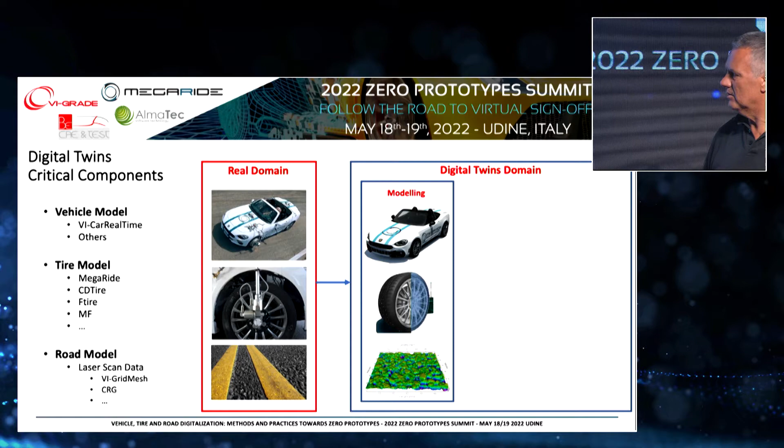Yeah, zero prototypes. Digital twins, sure. We want to go to that level. We can do digital twins of several different components: the vehicle, the tires, the road, and the simulator. All these together could basically replace the real experience. And we started this joint work more than 1 year ago, putting together all the elements that make us confident that the digital twin, not so much of a specific vehicle but as a process, could hold, to continue the discussion and rely more and more on this duplication.

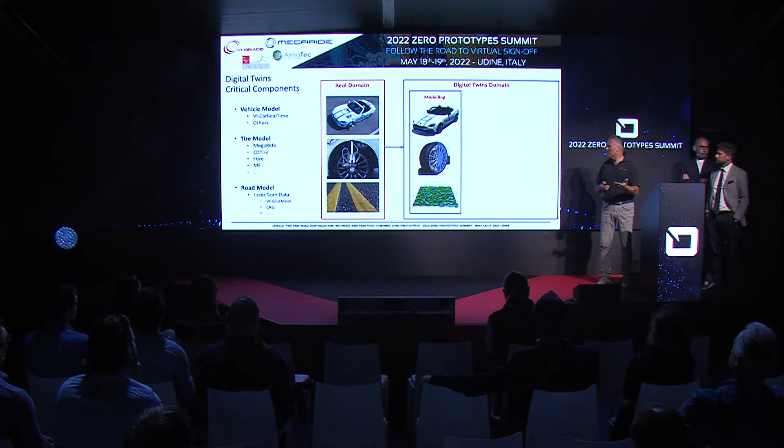So we are okay with the vehicle model, with the tire model. The road model has always been something that for us was basically just inherited from geometrical measurement. But in reality, what we need to be sure of is that the road model, the tire model and the vehicle model are compatible with each other. So which type of work has to be done, for example, in combination with the road, the tire model and the vehicle model to have a reliable result.

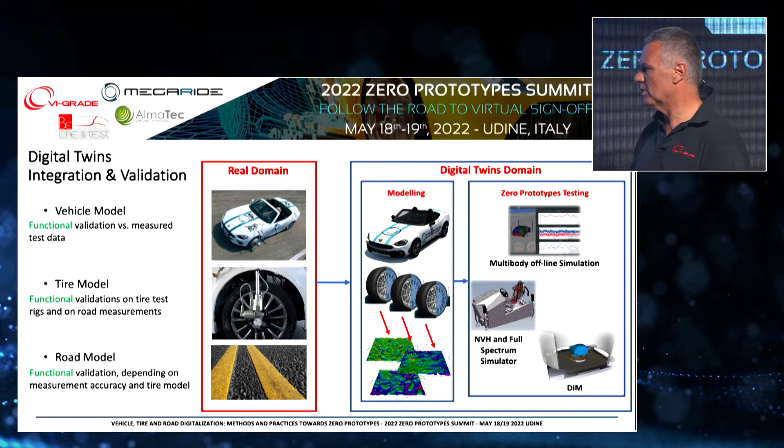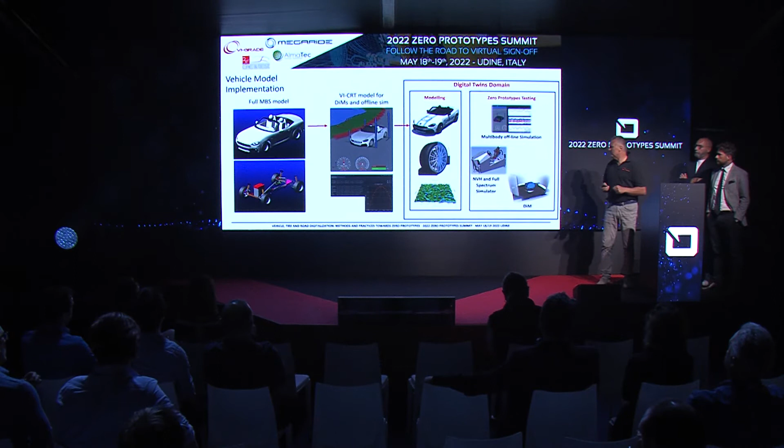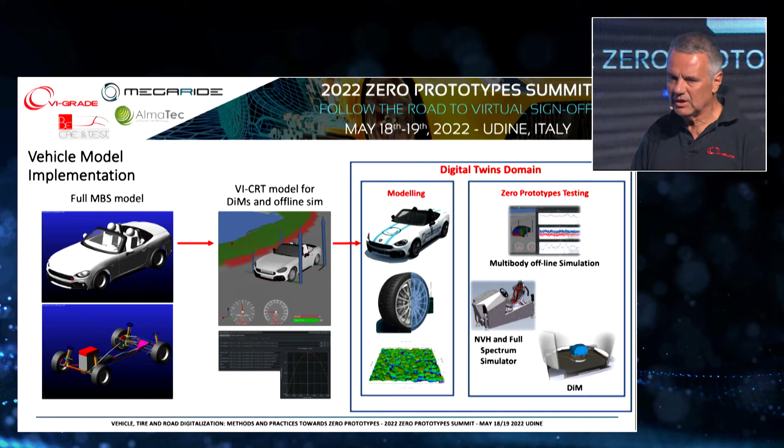You will see later. We want to have the full experience on the driving simulator. So we develop a really detailed model of the vehicle. Maybe we go to a simplified model or use the detailed model depending on the application. We use functional modeling, not only the independent component-specific modeling; the integration of the modeling is certainly a very important part to consider. And you will learn later what detailed activities need to be done to have this respond to requirements.

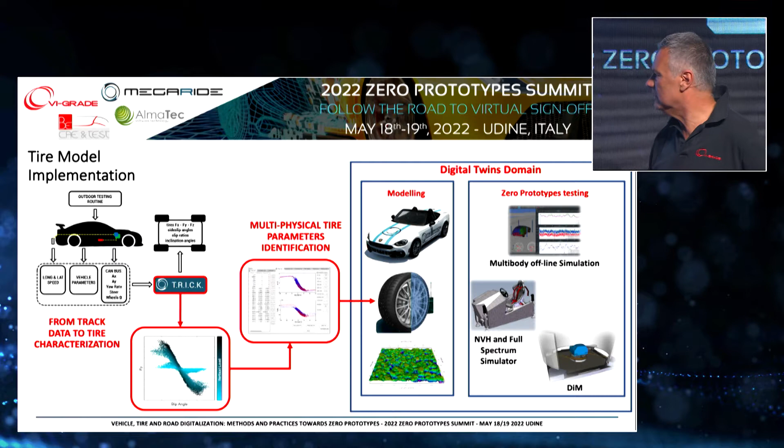Obviously, for the functional road model, there is some activity that has to be done, also measuring and knowing what is required to be captured to provide in the simulator the important feedback for the driver. Then we can probably digitize everything, but the only thing we cannot completely digitize is the human driver. So after we do a really good job, how do we make sure that all this can be perceived in the right way by the real driver? We still have a real human on board the simulator.

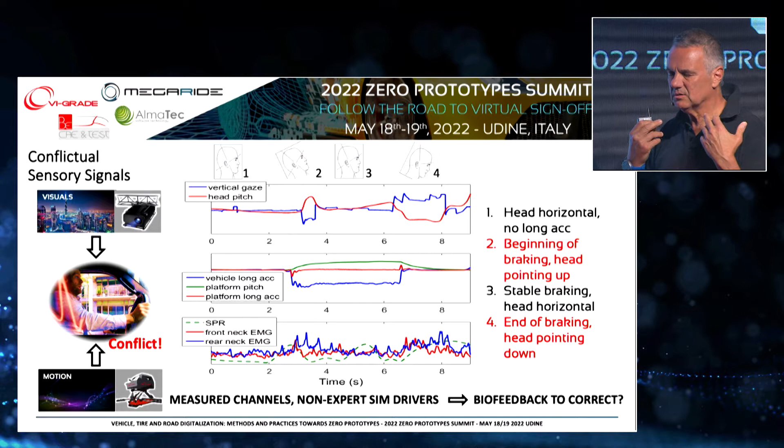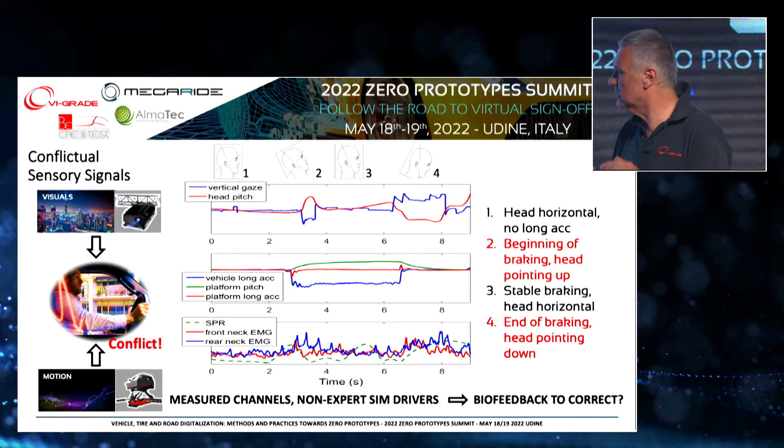And in this simple case, we illustrate how, for example, there is a sensory conflict in a simulator when during a braking action, the human expects to receive a certain acceleration, so he pulls the muscles of the neck back, resulting in the head, without any consciousness, being tilted upward, while the gaze goes down to keep the horizon fixed.

And this is probably creating too much of a rotation, unstable rotation of the head. One has to realize what could be, especially in a beginner driver in the simulator, his limit. And one idea that we want to apply and see if it could work is to apply biofeedback on the simulator, like skiers are taught by a coach when they see themselves again, for example, during an action. So it is possible to correct a little bit beyond what normally could be thought.

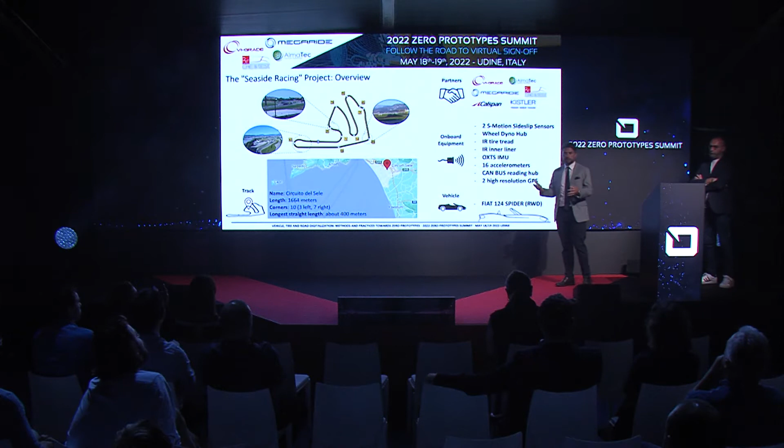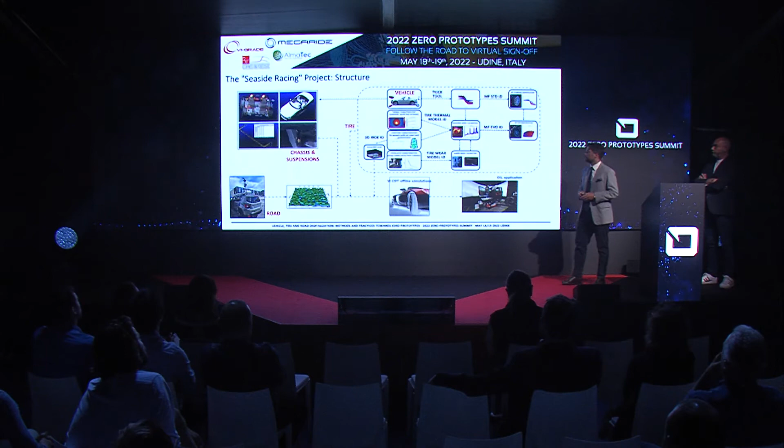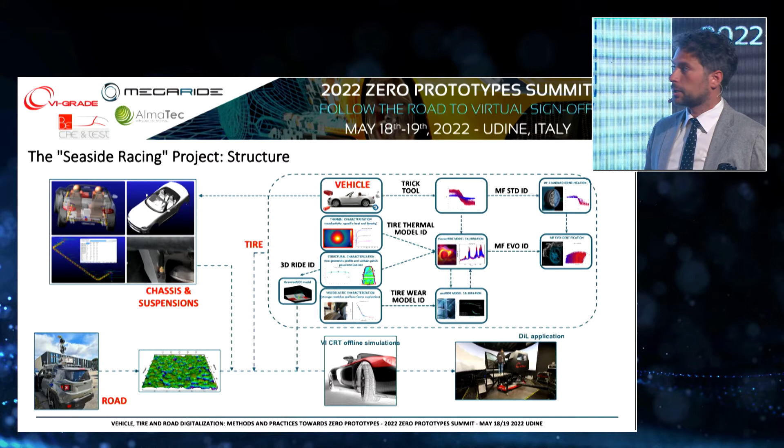So a potentially unknown track, potentially unknown vehicle, potentially unknown tires, trying to digitalize all of them with the process. The main idea is starting from the multi-physics of the tire, with a certain tire of which we don't know anything at the beginning. Then the activity we usually do on vehicles regarding the parameterization inside, for example, CarRealTime. Then there's the road, with the devices which allowed us to know something more about that road, virtualizing it and bringing it first inside the offline simulation channel, and after that into the driver-in-the-loop application.

So the targets of the project were optimizing the road texture geometrical resolution related to tire modeling and contact multiphysics. Then we wanted to deepen knowledge on tire ride and wear effects on the driving perception. We want to correlate road geometrical, frictional, and acoustic features of the road patches, and implement all of that inside the driving simulator for a multisensorial experience.

So the first step of our activity concerned the road and the external environment. With the proper instrumented vehicle, we had laser scan integrated photogrammetry, 3 cameras and 2 lasers with millimeter resolution. We scanned all the road of this track, which is Circuito del Sele. The main idea was to clean and filter the road point cloud in order to generate a grid mesh from zero, and after that, create a correlation between the measured roughness and the algorithm parameters. That was the first step.

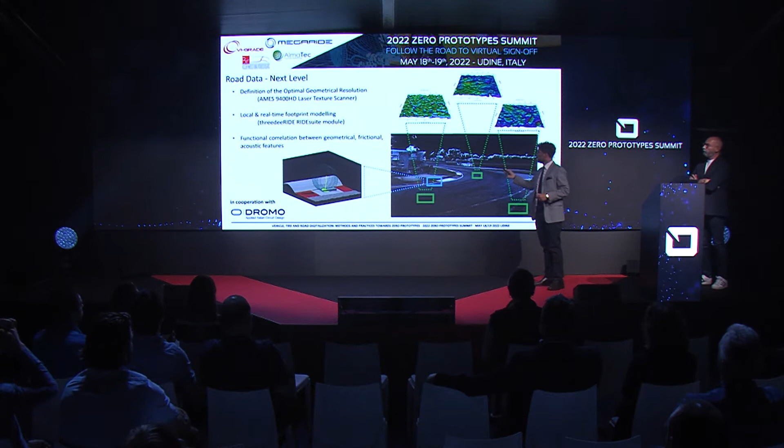The second step is assigning to each single point of the grid mesh some specific functional correlation. It means geometrical, frictional, and acoustic features to each different patch of the road, which has been scanned also with a very high definition rugosimeter, the AMES 9400HD.

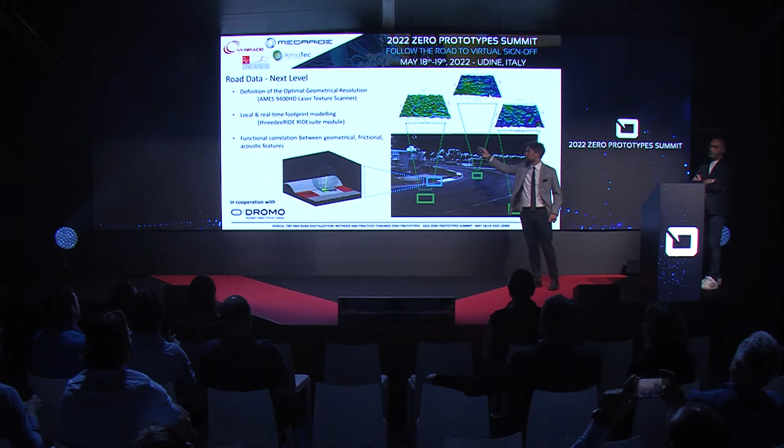Next step, we moved to tires. We selected the tire, it was a Toyo tire, and we used several different methodologies to get the tire data. The first one was with our TRICK tool, which takes the data from the vehicle and allows us to characterize the tires. We also worked with Calspan and their bench, and we also mounted a wheel hub by Kistler on the wheel. So we had 3 different ways to understand how the tires behaved.

After the kinematics and dynamics, we worked on temperature and energy, so we characterized the thermal conductivity, the specific heat, and the footprints with completely non-destructive methodology, and we put them inside our thermal model. And once we have the energies and the temperature, we also have the roughness of the road, and the viscoelasticity of the tires by means of an innovative device called VESevo, which is in our booth in the next room. We had all the ingredients of the recipe that allows us to talk about wear and degradation.

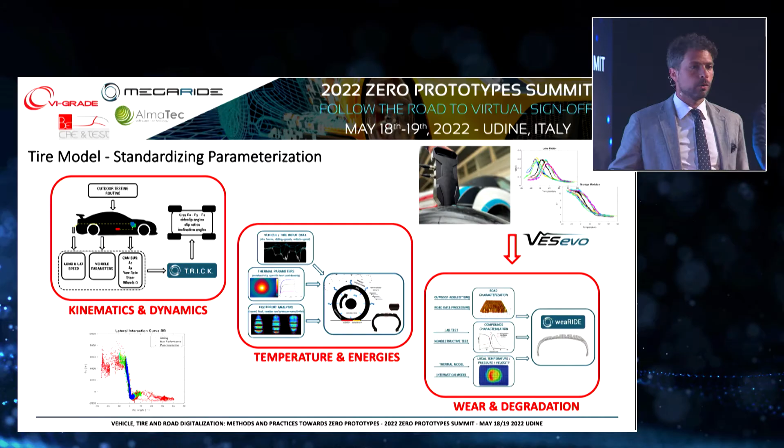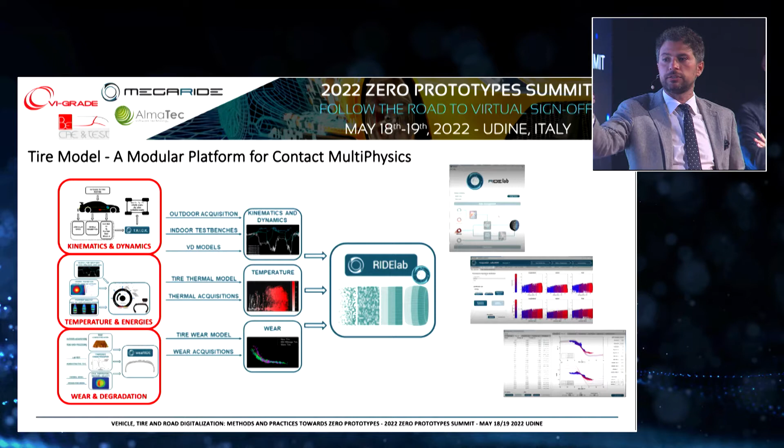Wear is a very complex phenomenon which involves many things which come from so many different phenomena. So after that, we parameterized all our models, feeding a specific identification platform, which is called RIDElab, which takes into account all the multiphysical phenomena, so the kinematics and dynamics, the temperature and the energies, and the wear and degradation, putting the right parameters inside the physical models which constitute the RIDEsuite tire model.

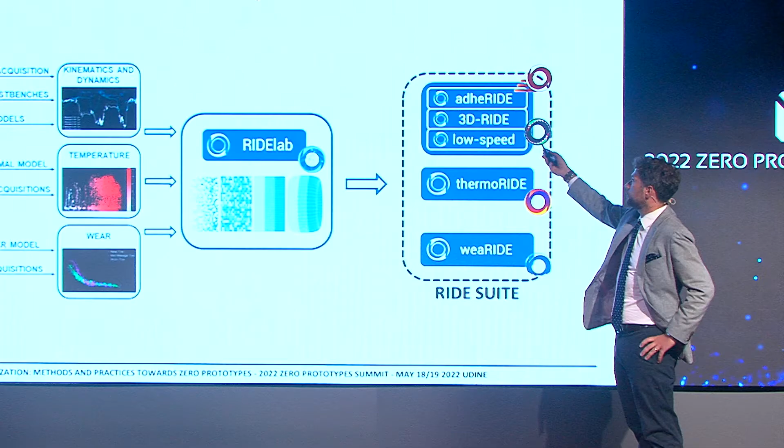We have an advanced Pacejka model which feels temperature, road roughness, and viscoelasticity. We have a 3D multi-contact model that Gabriele will show us later. We have a low speed module because, as you know, sometimes MF has some issues with low speeds. We have a thermal module and the wear and degradation module.

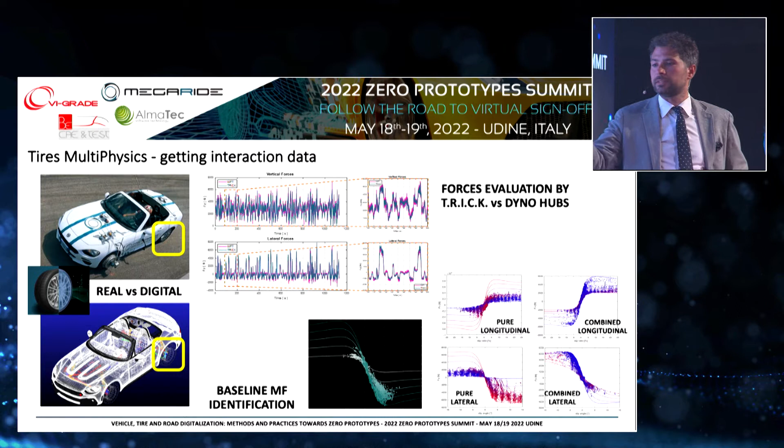What we did in terms of operative activity, we understood how we were estimating the forces with our methodologies. So here we can see that with TRICK methodology, so from the vehicle data to the road, we are able to estimate the forces with very high accordance with the instrumented wheel hub that we had. After that, of course, we identified our baseline Magic Formula.

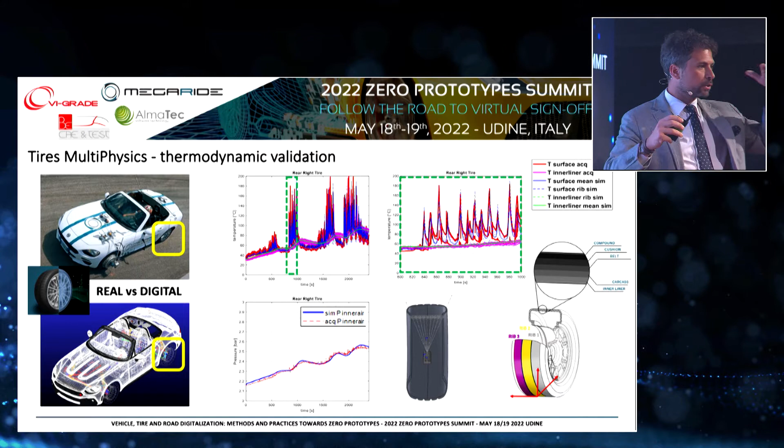Second step was identifying the thermal model. So we calibrated and we validated the thermal model, taking into account the measurement that came from the external tread and the inner liner sensors. And once we have properly identified and calibrated the model, we have all the information about the temperature layers which are inside the tread block.

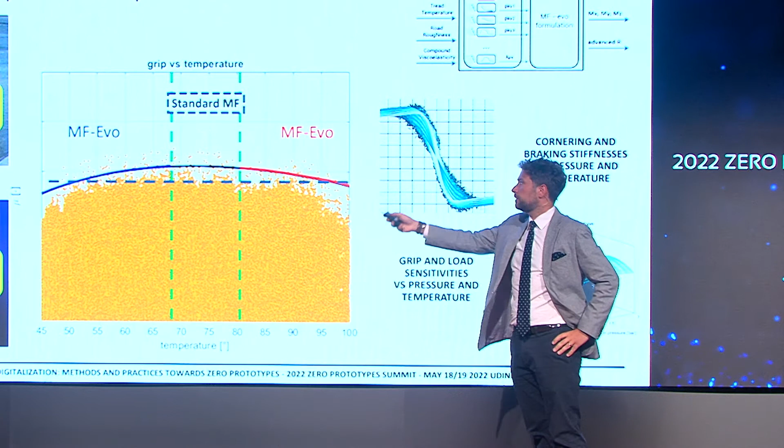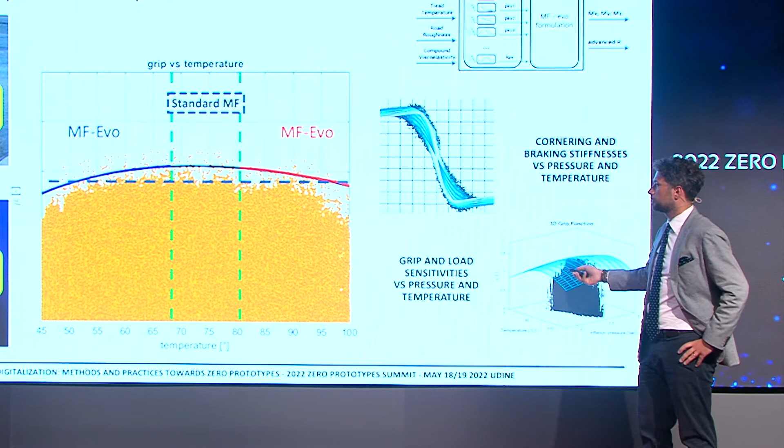Having this kind of information, it's possible to understand how the friction level is changing with respect to the temperature, to identify this kind of trend, putting them inside the advanced Pacejka formulation, taking also into account the variation in terms of cornering stiffness, braking stiffness, and of course, inflation pressure sensitivity. All these things go inside our advanced formulation, which is called MF-Evo, which allows us to put all these things inside the simulations. We also validated these things thanks to some Calspan data.

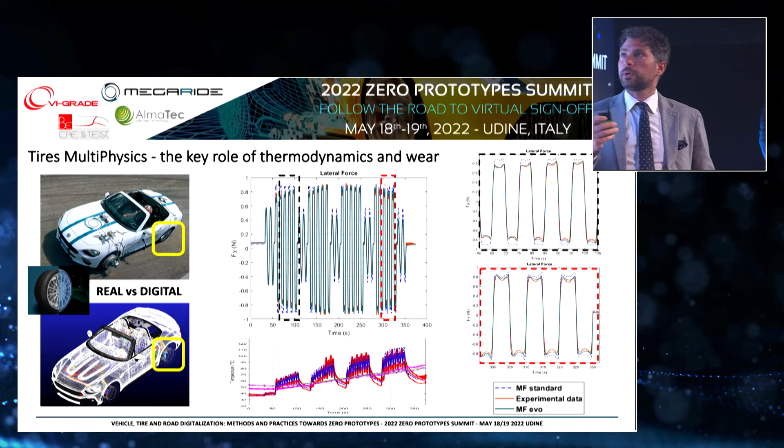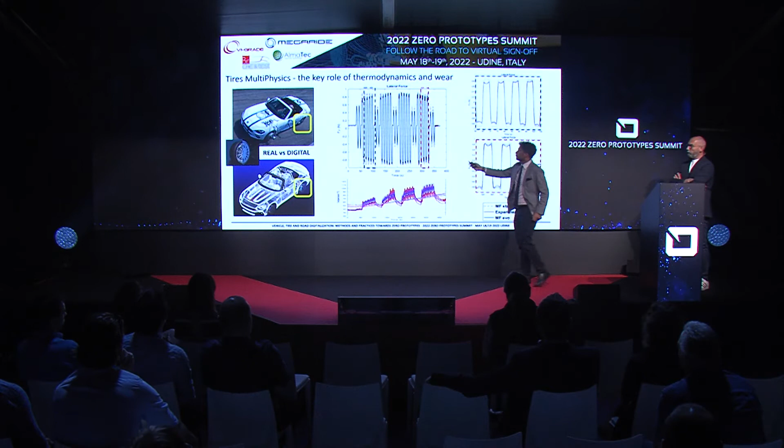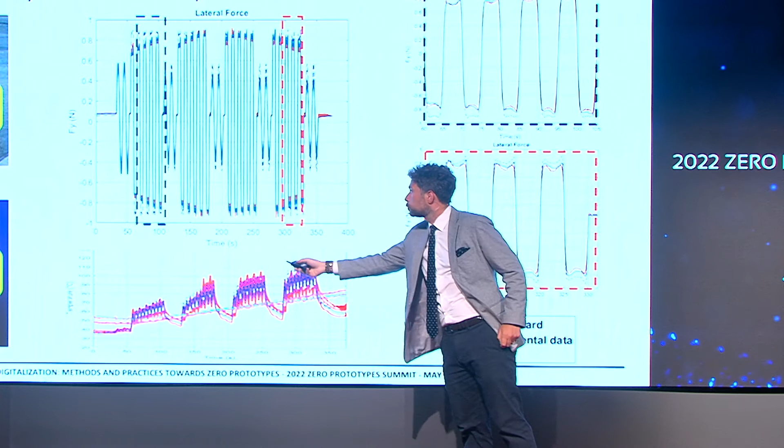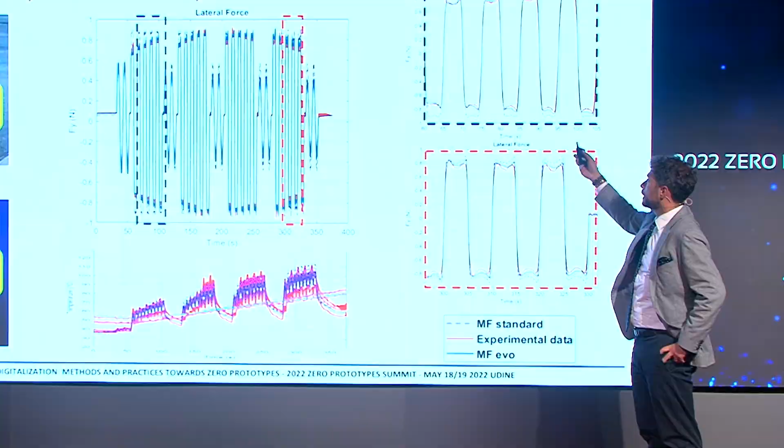And what we can observe inside a typical test is that if we identify a Pacejka at the optimal friction level of the tire, we will be able to fit only the results of the Pacejka when it reaches its maximum. But when the thermal level at which the tire is working is too high or too low, inside the red and black squares, we see that the normal Pacejka is no longer able to fit the friction level and the force level, that can be fitted only taking into account the thermal effects inside the Pacejka model.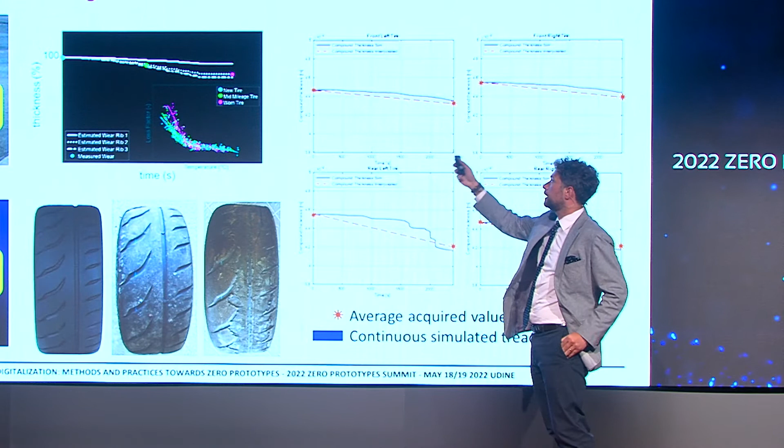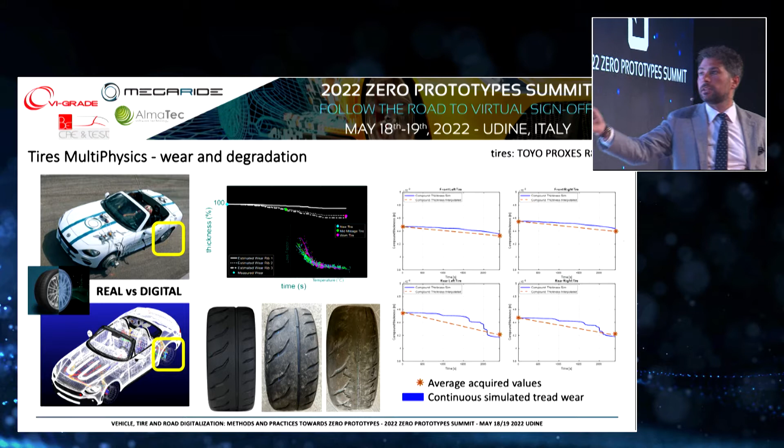Finally, once we had all these things, we put them inside our physical wear model. So we were able also to validate the wear on track because we had the acquisition at the beginning and at the end of each run. And so in this way, we have the acquisition in terms of energies, in terms of temperature, in terms of road roughness, in terms of viscoelasticity variations of the compound of the tire, and we're able to know time by time the evolution of the tread thickness level of each tire taking part in this activity.

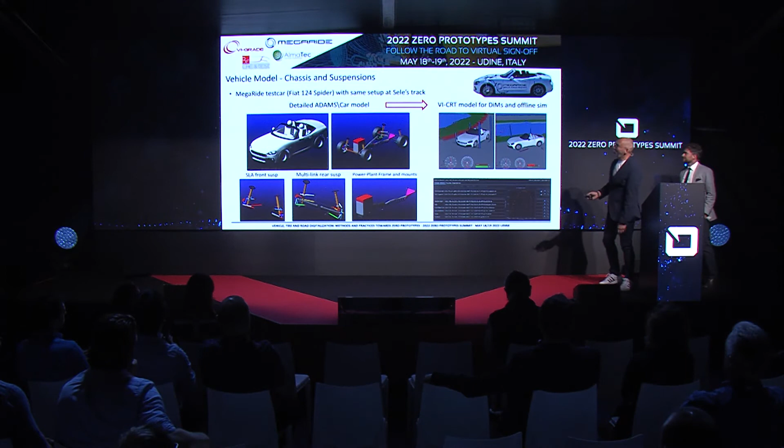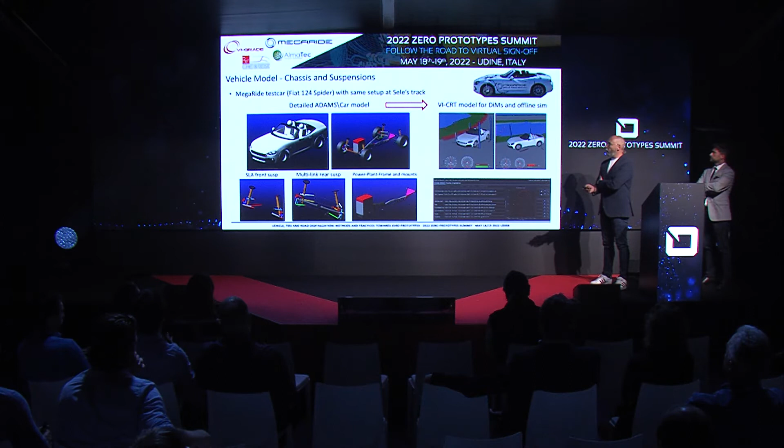Of course, it is the last step, but it is not last in the order of things that have been done: the creation of an appropriate vehicle model. Of course, this is a standard procedure, starting from a detailed multi-body model with many degrees of freedom, and even including the powertrain mount system, into a real-time car model that can work in our driving simulator. Of course, there are initial steps, an offline validation using the offline tools. And of course, we had the possibility not only to make a correlation and validation based on,

I don't know what happened, but okay, once again.

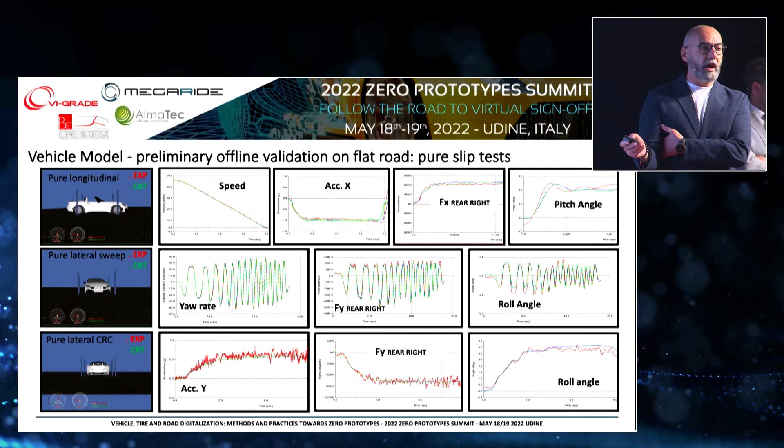Based not only on standard signals like yaw rate and lateral acceleration, but also on forces, lateral, vertical, longitudinal forces obtained from the dyno hubs that were installed. Then we moved offline to a max performance simulation environment, trying to catch the differences coming from different levels of road discretization and road roughness. And of course, having also the possibility to compare the calculated loads and the measured loads along the whole track.

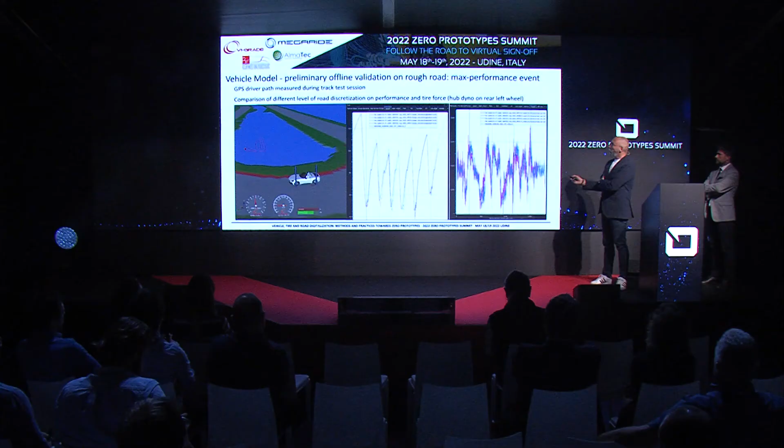After this phase of correlation and validation offline, we needed to understand the feeling of the driver, Claudio Anicello, the driver who is currently running in the demo section at DIM 400, and to receive his impressions comparing the real driving with the driving at the simulator, but not only in a single scenario, but with different simulators, 150, 400, and even the compact, moving from standard operation, which are considered like a sort of chassis tuning

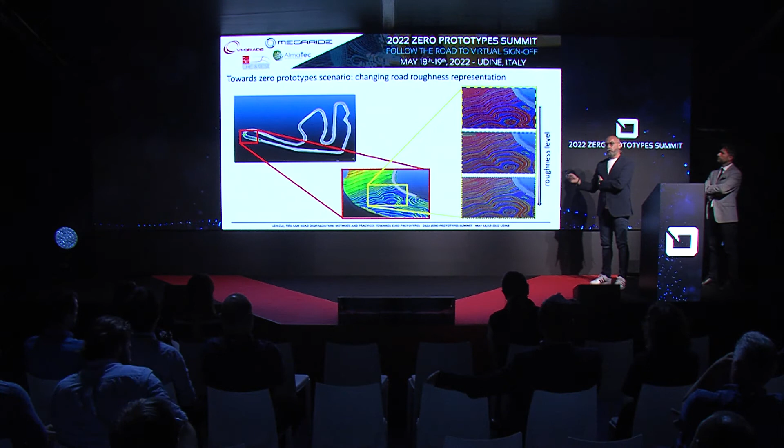towards, we said, zero prototyping, but also to understand the feeling when you change the road surface, when the temperature of the tire changes, so the heating of the tire, and even the wear effects on it based on the model delivered. And not only this part, but also trying to understand what is the best solution in terms of road roughness. Here is a representation at the end of the main straight line of the Sele track, when AlmaTec tried different ways to obtain an efficient point cloud representation, a grid mesh representation of the road.

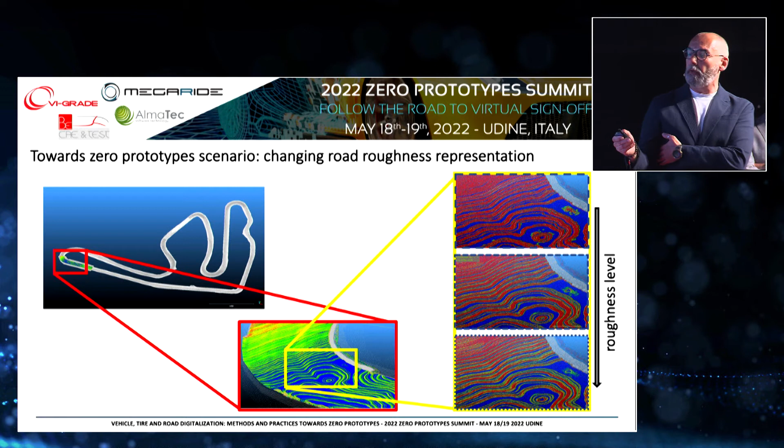And we had an additional possibility: during the road tests, we fitted the car with more than 20 accelerometer channels to measure hub accelerations, seat rail accelerations, and many other points of interest. So in this case, for example, we have a power spectral density calculated using car real-time output compared with the experiment; the blue one is the measured power spectral density. We had the possibility to compare this PSD against different calculations obtained from car real-time with different roughness levels using the 3D

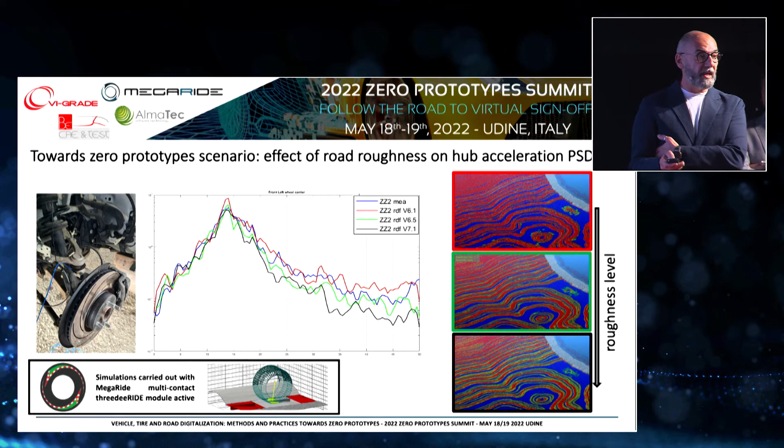ride model of MegaRide. And finally, we had also the opportunity not only to check the accelerations, but also to make some comparison in terms of power spectral density of forces. Here is, for example, the vertical direction, to be aligned to the previous slide, but it's a different point. The previous one was on the front, this one is on the rear, just to represent the different measurements that we have done and compared with

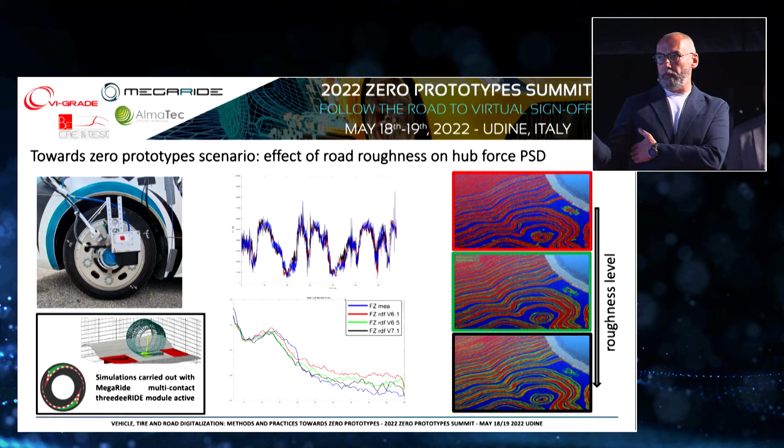numeric results. And in all this scenario, which tends to zero prototypes, of course, we had the possibility to have the feedback from the driver and to understand how the driver was able to catch, for example, the change in the tire temperature during different laps at the simulator, to feel the change of the car while changing the wear of the tire, or how the road perception affects his feeling of the car, and how all these parameters can have an effect on the global chassis tuning of the car, because there is not a single optimum in terms of chassis, but we need to consider different conditions.

And finally, where next? We were really happy with what happened with this fantastic opportunity that we obtained last year. So we decided to go to a second edition, which was held on the 5th of May. I do hope we will have in the future the opportunity to tell you what we have done. But of course, as you have seen in the first video, we decided to move to deformable soil. As you see, very different kind of vehicles, a rally car.